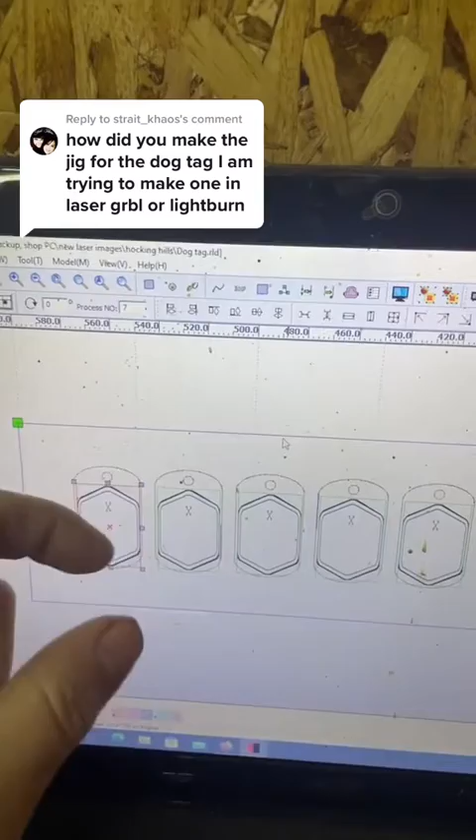Hello. So how I made my dog tag jig, let me show you. Obviously, you're going to need a physical dog tag. Once you get that, go over to the software. I apologize, I don't know LightBurn or GRBL, but it should be pretty straightforward on the same thing. I'm using the Boss laser software.

But once you have your dog tag, go online and find a generic image of just a dog tag, import it into your software. On the Boss laser, I use this. It's the BMP or the bitmap handle. This isn't going to be the right image, but you'll get the idea. So this, again, imagine this image is your dog tag.

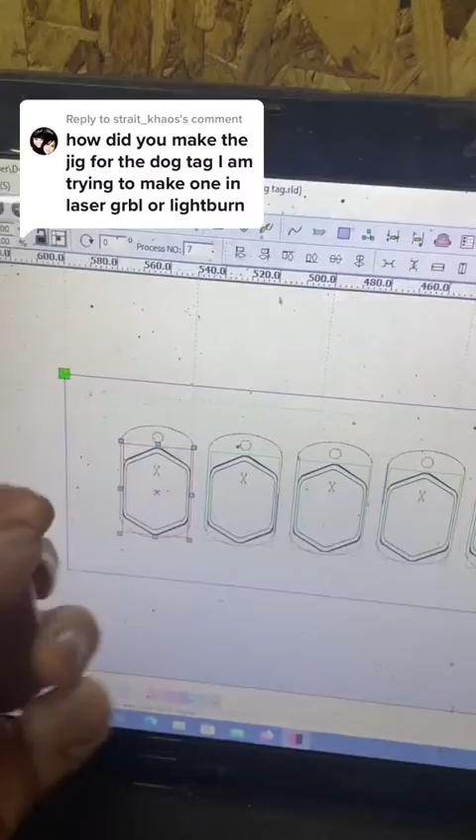Now what this does, this will trace the outline of the dog tag so that you can physically cut it on your laser. So once you have that outline that you want to cut, you can just measure your physical dog tag to make sure that in the software, the sizes will be the same.

Then it's up to you. You can put however many you want. You can do whatever spacing you want. Again, make it as long as you want. You can go 2 at a time, 4 at a time, doesn't really matter. But then you will physically cut out that section.

This is just some scrap acrylic I had lying around, but you'll physically cut out each spot onto your acrylic and then put a backer onto it. So again, this is just another piece of acrylic I had lying around, but you can use wood or whatever you got. And again, this is just double-sided tape. So double-sided tape, glue it, whatever you want, so there's a backer to it.

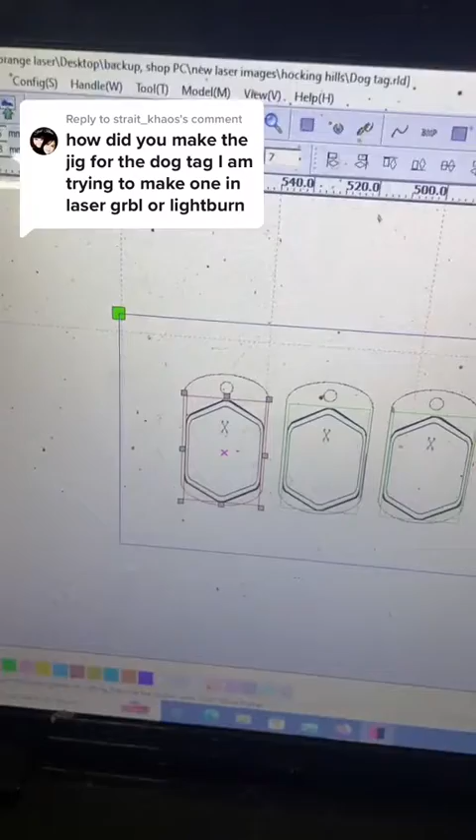And that's it. I made a note for myself, so if I ever take this jig out, I know that I need to set my focal point to this corner. So back to the software, I would change my starting point to down here. So when I put this jig into my laser, it'll all match up.

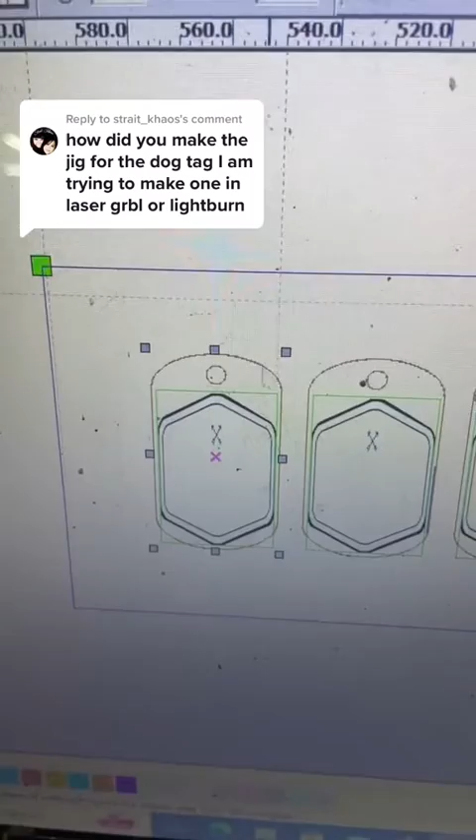Then you can put whatever designs or image that you want into the dog tag area. Just make sure that the dog tag area is turned off within the laser. So mine's the brown line, so it's turned off.

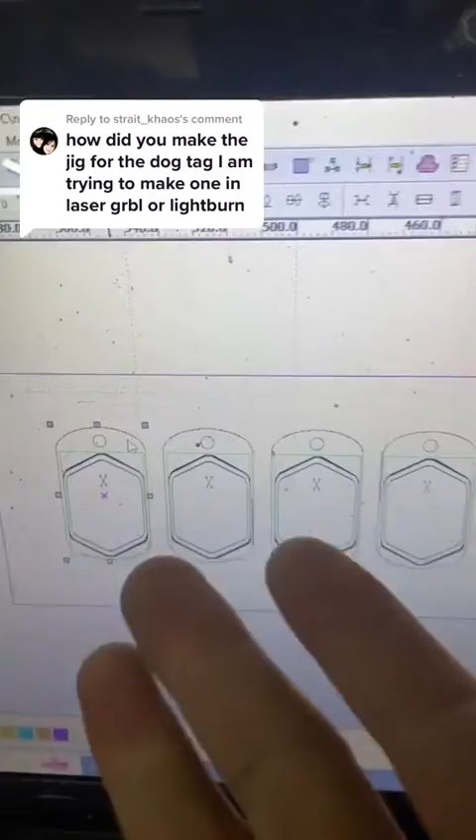Obviously, once you cut this jig, don't move any of these dog tag outlines, because then you'll screw up your entire jig. But yeah, then just put in whatever images you want and have fun. But I hope any of that rambling made any sense whatsoever.